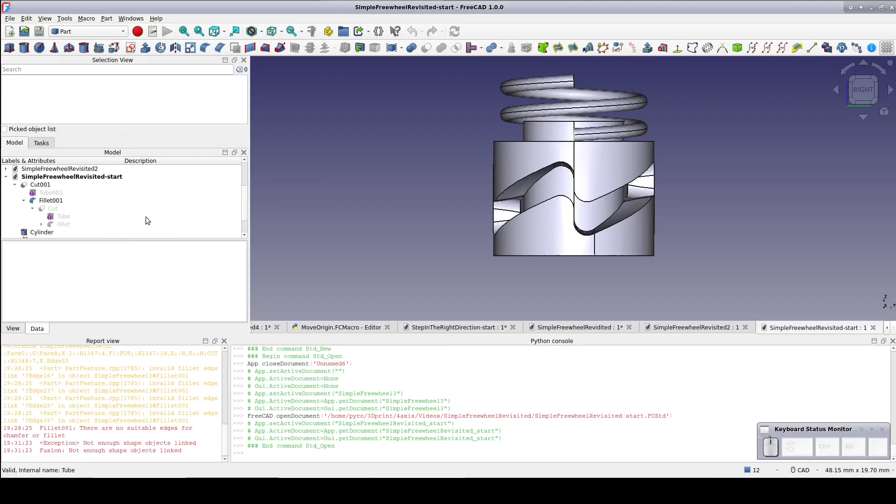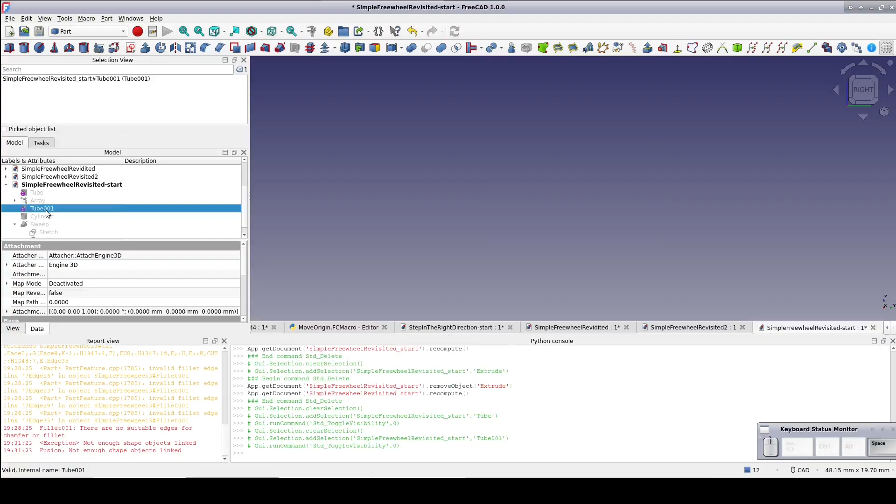I have the final model of the simple freewheel. Start by selecting and hiding the spring and the internal cylinder. Get rid of the fillets and cuts since those are going to have to be redone with the new shape. Also get rid of the extrusion on the cutting tool. Just to make things a little clearer, I'll hide away tube 001 now since we don't need to be concerned with it until later. Make the first tube and the helices visible to give us a good guideline.

Just to refresh our memory, the helices have a pitch of 16, a height of 4, and a radius of 3.9 millimeters and 6.1 millimeters. Both are right-handed. So I'll start with creating some new helices. This time I want them to be left-handed so that they'll cut against the part that turned out as a sheer wall in the original. I'll set the pitch to 32, making the wall in the reverse direction twice as steep as it was in the slip direction. Keep the height of 4 and the radius is 6.1.

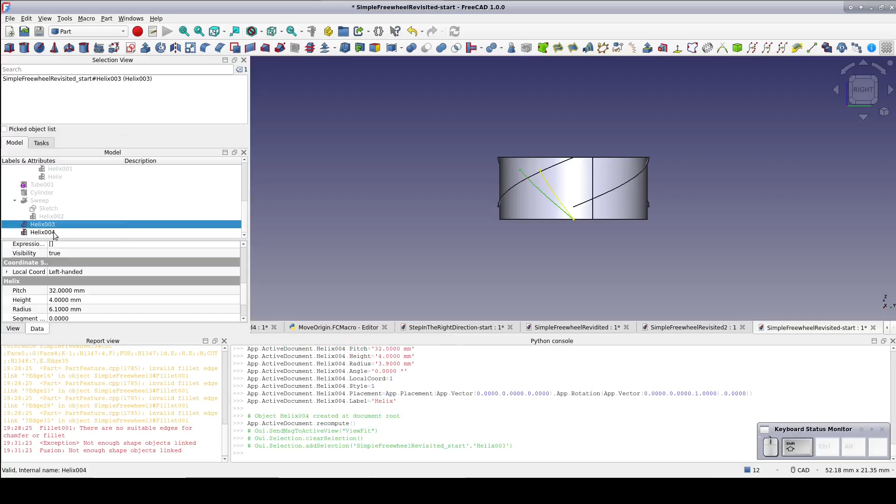I'll just leave the dialog open and create a second helix with a 3.9 millimeter radius. Of course, they're not aligned. You may recall from the previous video that I applied a z-axis offset of 1 millimeter, so we just have to set that for the two new helices. That lines up perfectly. Just like last time, I'll select the two helices and create a ruled surface between them. I'll hide away the tube so you can see it.

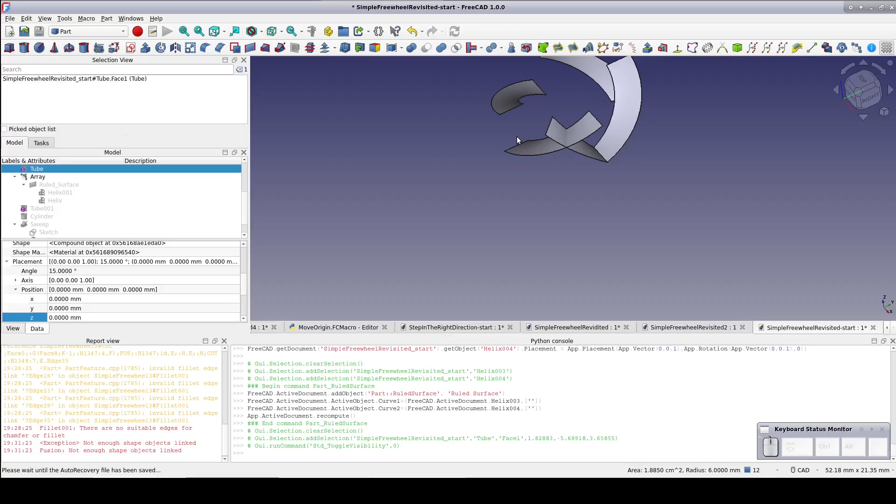The original was done with a polar array with a count of 4, so apply the same to the new ruled surface. As usual, reset the center point and OK. Extrude each of the arrays to a default of 10 millimeters, manually selecting the z-axis for the direction, since FreeCAD is not sure what the normal would be for the array. Now to fuse those together so the filleting will apply properly.

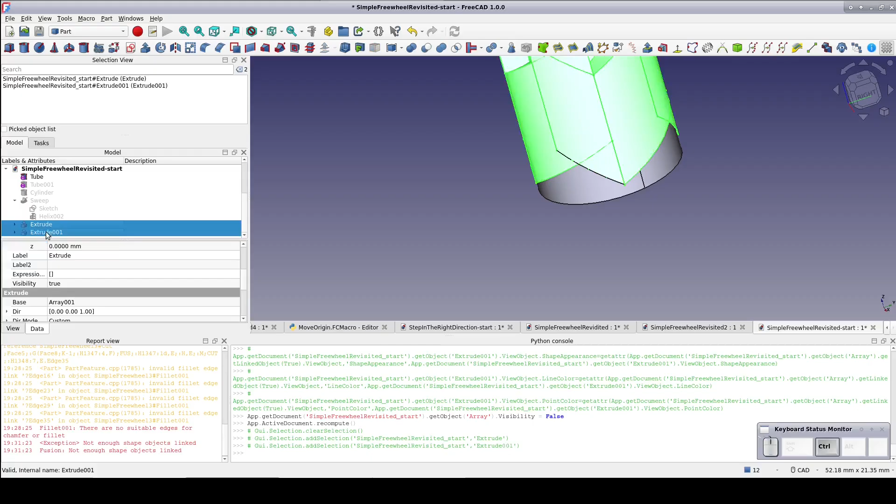But here we have an issue. For a reason I never did figure out, only the first instance of the extrusion from the left-handed surface actually appeared in the result. Something about that particular geometry with the arrays seems to have FreeCAD dazed and confused. But since it did get the original instance right, this gives me an idea of how we might proceed.

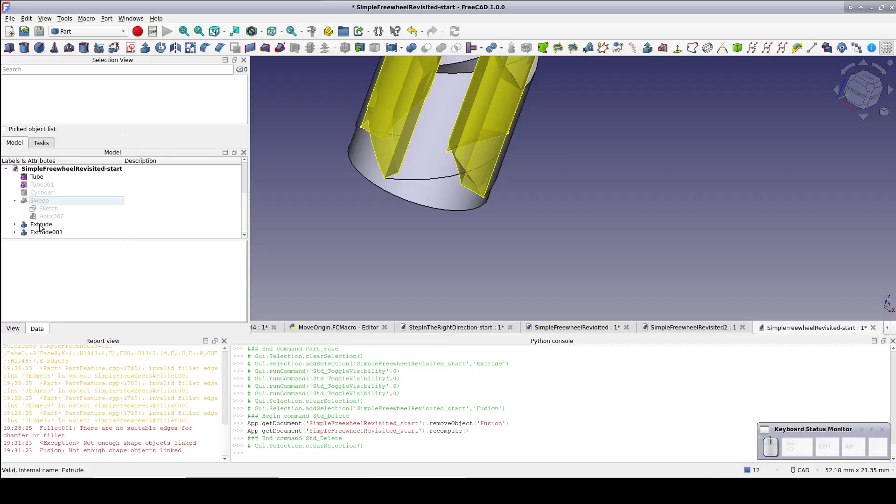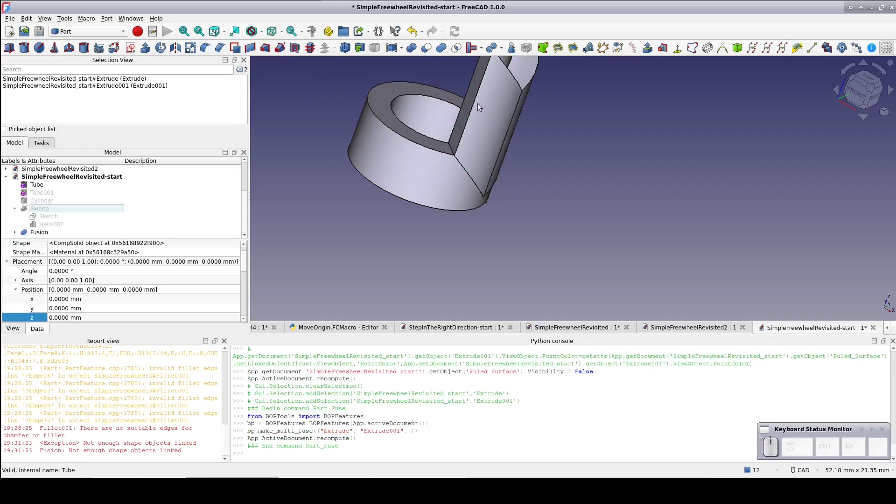Delete the extrusions and both of the polar arrays. Redo each of the extrusions, once again selecting the z-axis manually for the direction. Fuse them together now. That appears to have produced the correct result. Apply the 1 millimeter fillet to the bottom where they come to a point to give us a nice rounded surface we'll want in the final.

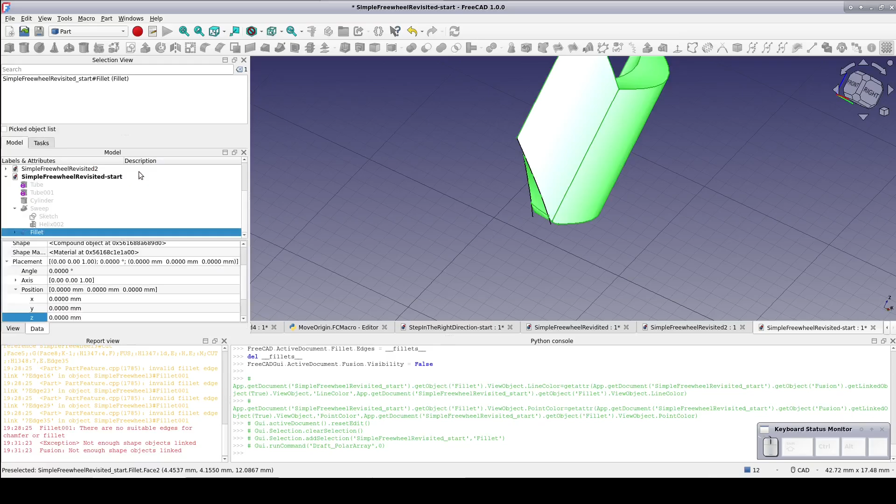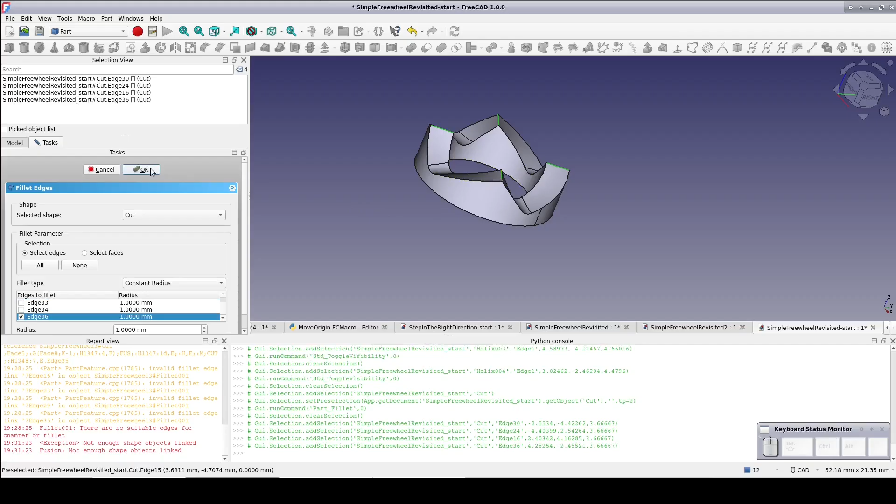Select the fillet and create a draft polar array. Count of 4, reset the center, and OK. Much better. Like last time, bring the tube back, select the tube and the polar array, and cut. Hide away the helices so we can see what we have. Select the cut and fillet. Apply the 1 millimeter fillets to the top points of the shape and OK. That looks much more like what we were hoping for.

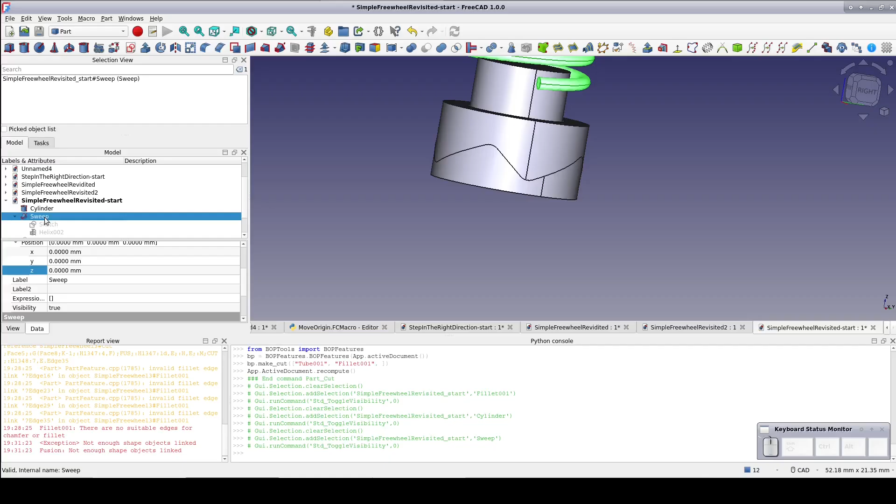Like last time, bring in the second tube, select the tube, select the bottom and cut. And there's our new freewheel with camming action to limit the drive force. Bring the coil spring back and raise the top of the freewheel so it's identical to the way it was displayed in the original. But I think maybe the drive force is too limited here.

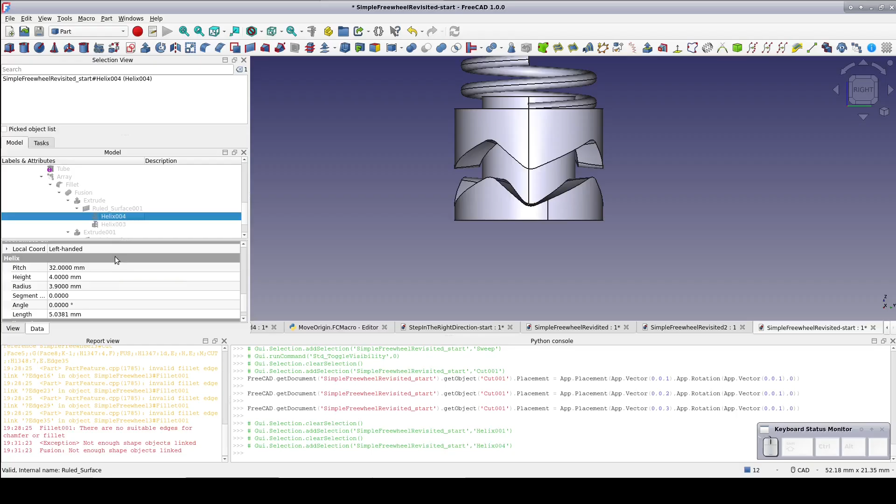Fortunately, we have a parametric design. Select the two left-handed helices and increase the pitch to 64. That's exactly what I was looking for.